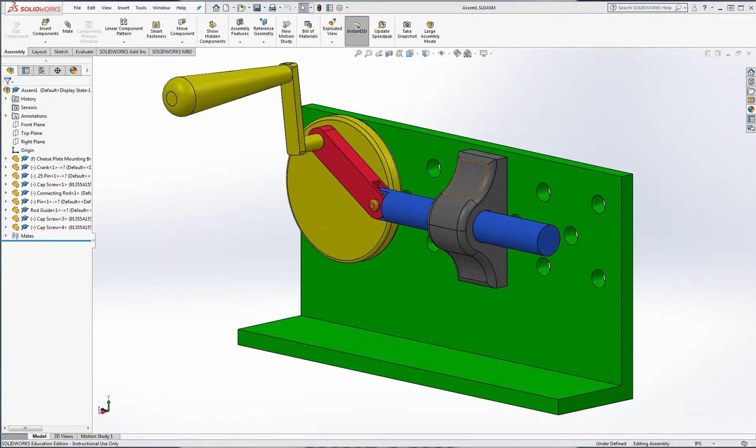My name is Joseph Check, and in today's video we're looking to create this simple assembly within SolidWorks. Hopefully this will give you an introduction to the basic mates within SolidWorks and also just an understanding of how different parts work together in an assembly. This is just a simple mechanism I created that translates rotational motion into linear motion.

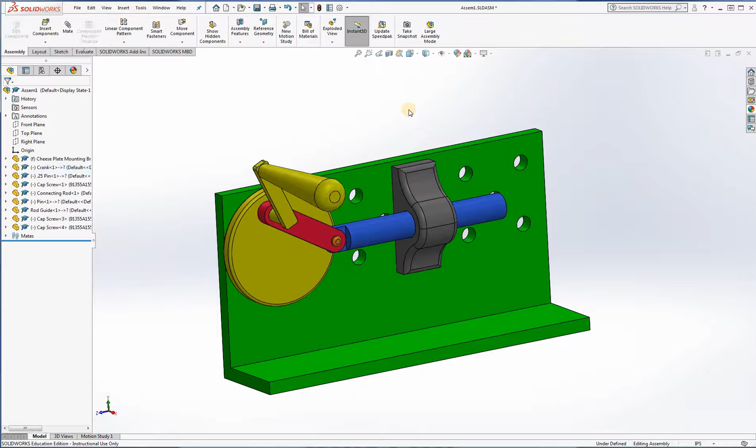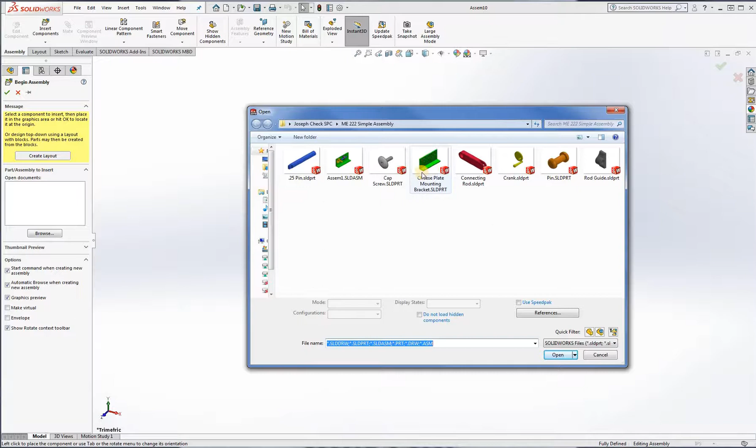When you first open up SolidWorks, you want to head up to the File tab, click on New, Assembly, and OK. Once you find all the parts that you have downloaded, we will start with a static part, which basically means that this part will not move within our assembly. It's basically going to be the part that all the other parts connect to and use as a reference. In our case, it's going to be the cheese plate mounting bracket. So let's click on that one and click Open.

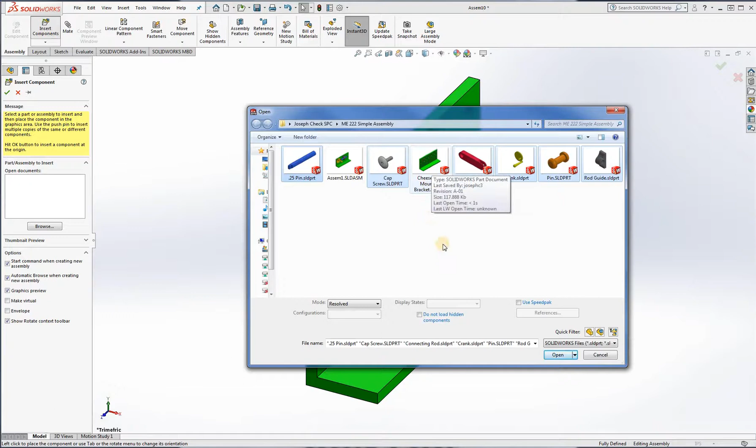Instead of just dragging and clicking into somewhere within my viewport, I'm going to just click on OK, and this basically sets up my part wherever it needs to be in my assembly. Now we can go back to Insert Components, and I'm going to select all of the parts that I have yet to put into the assembly. So I'm going to select all of these. So I'm just excluding the main assembly that's already completed and the mounting bracket that I have already imported. So let's click on OK.

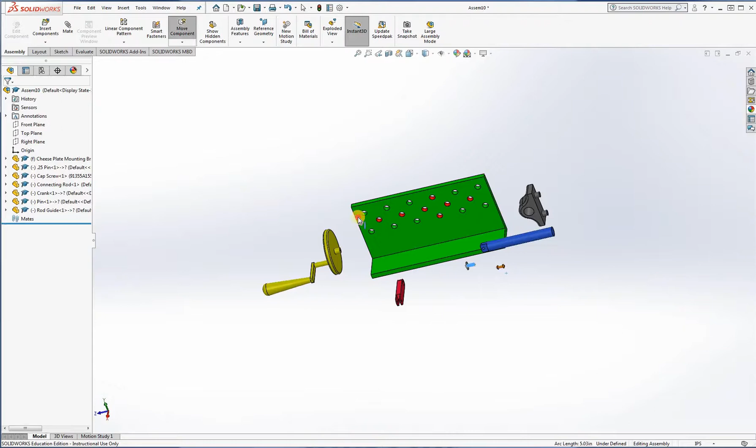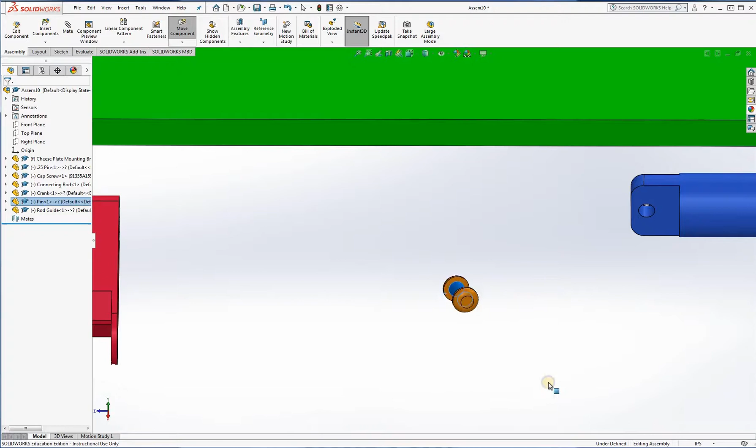And now you can consecutively place all the parts that you selected. So let's go ahead and do that. So once you place all of your parts, you can move them around to make it a little bit more convenient to where they are placed. In order to move a part, of course, we can just click on any surface and drag that where we would like. To rotate a part, such as our pin right here, we can right-click and hold down and then drag that in place to rotate the object wherever we need it.

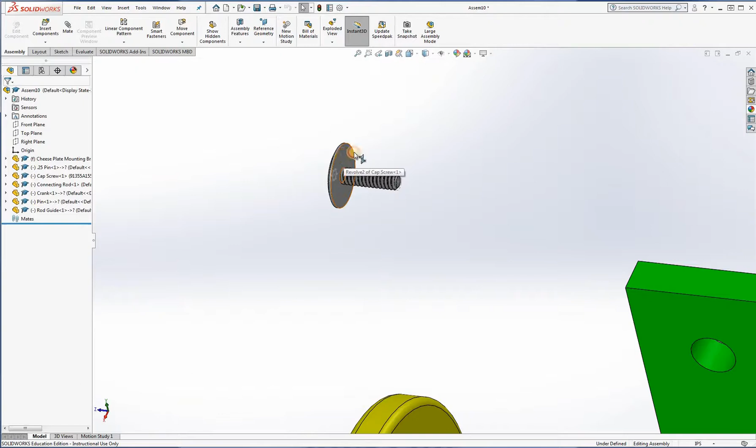Another quick tip is duplicating objects within SolidWorks. So in our case, we need a total of 3 screws, but instead of going up to Insert Components and just selecting one screw after another and importing them, you can hold down Control, click on your part, and drag it out to the side. And this can be repeated as many times as you need. So again, hold down Control and drag down.

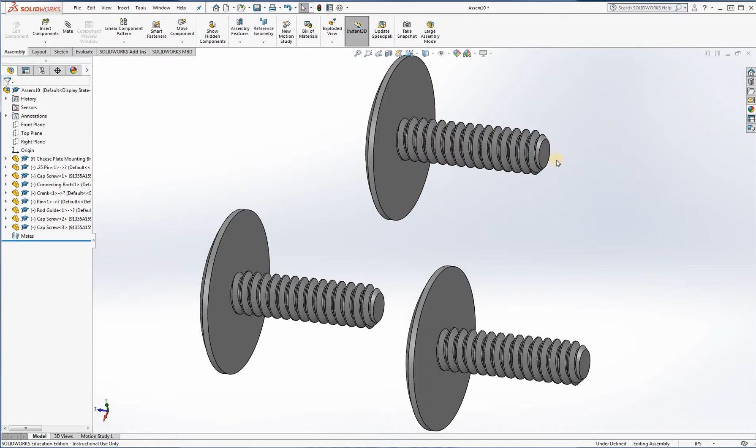Another tip is to remove the sketches that were used to create the part, and you can do this by going to the visibility options drop-down menu and selecting View Sketches and turning that off. That just makes it a little more simple, so you're not selecting a sketch and trying to mate it with different things. So let's go ahead and look at our first part that we want to mate. In our case, let's look at the crank here, and what I want to do is mate this shaft or this rod basically to fit inside of our hole that we have created here.

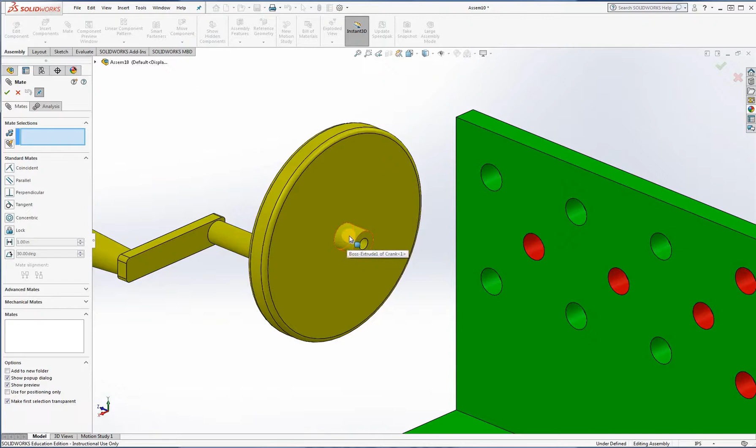So to enter into the mate menu, basically, we click on this mate button. So once you're in this mate menu, you can basically select 2 separate parts and mate them together one after another. When you have finished connecting all the models that you want, you can click the check mark twice. So as an example, I'm going to select this outside surface of this rod and then the inside surface of this hole right here.

SolidWorks automatically applies the mate that it thinks I want and orientates the part to the correct position. If your part does not orientate to the correct position, or if the part is basically backwards, you can always flip it using the mate alignment. So in case your part looks something like this, you can go ahead and go into mate alignment and just choose between these 2 options here until it looks correct.

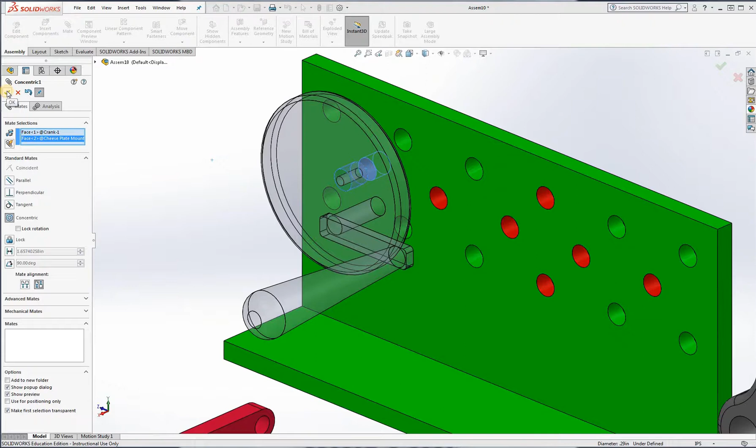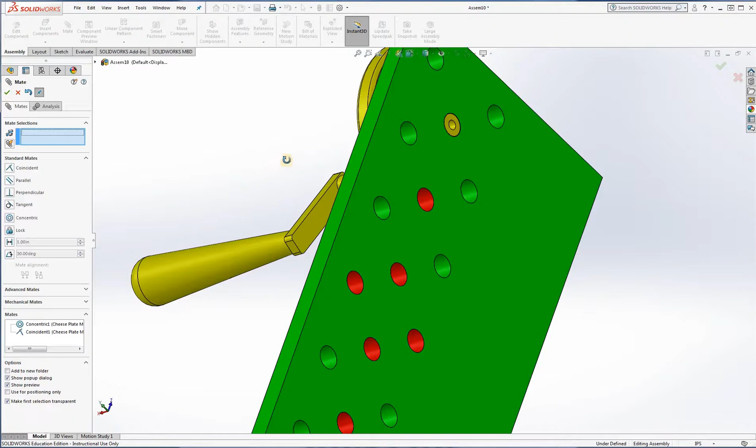Let's go ahead and click the check mark once, and as you can see, it prompts us to select 2 more objects. So we're going to select the face of this part here and the back face of this part here, and then we click OK. This was all the mates we needed to do with this one part, so I'm going to click the check mark one more time and exit out of the mate menu.

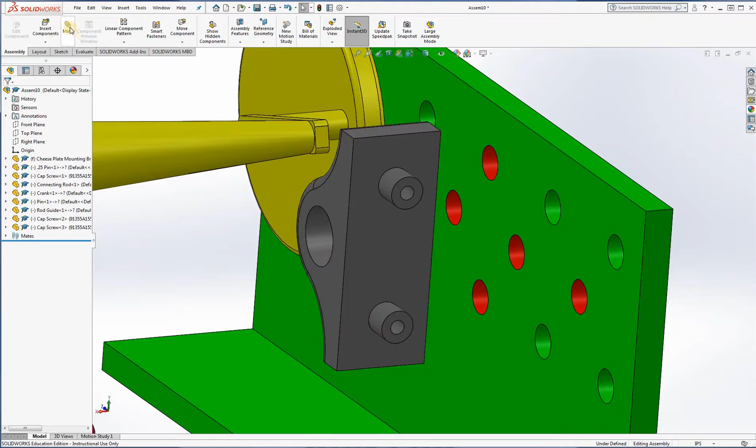So now we can go ahead and look at connecting our rod guide to the mounting plate. We're basically going to do the same operation, but in this case we have two of these slots that need to go into these holes here. So I'm going to go into the mate menu again, select the outer surface and then the inner surface. As you can see, our part has basically reversed its direction, so we want to choose another mate alignment. Our part looks a little weird right now, but that is only because the top rod and the hole are concentric and not the bottom. So let's go ahead and select OK once.

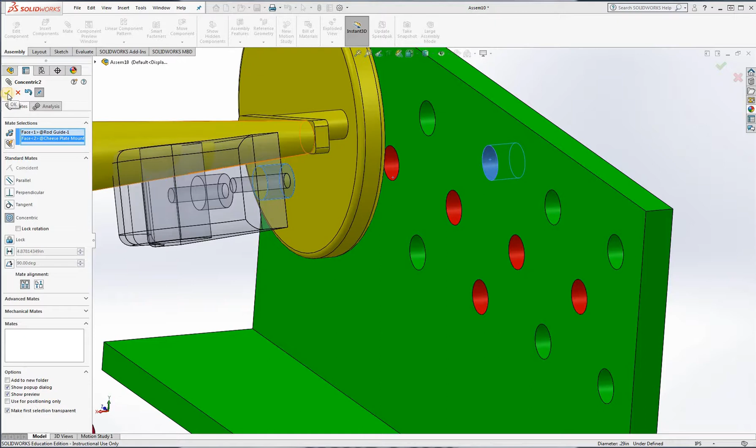We can go ahead and orientate our view to where we can drag this down a little bit, where we can kind of see the other rod here. Let's select the outer face of that and then the inner face here, and then we hit OK.

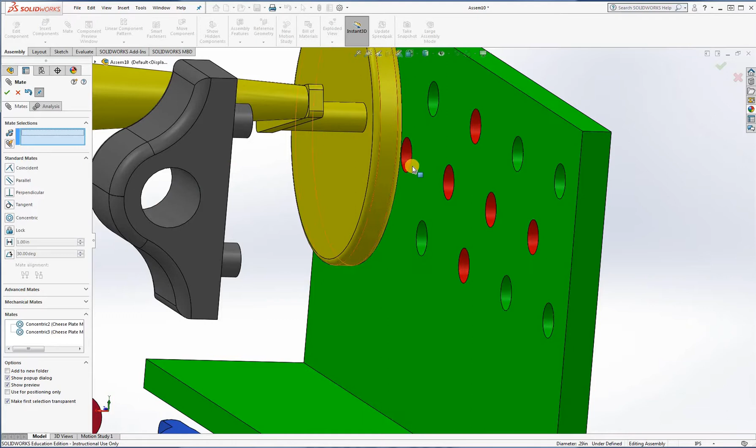So the last operation to connect our rod guide to the plate is to basically select the two faces that need to meet each other. So it's going to be this face and this face. And we'll hit OK twice.

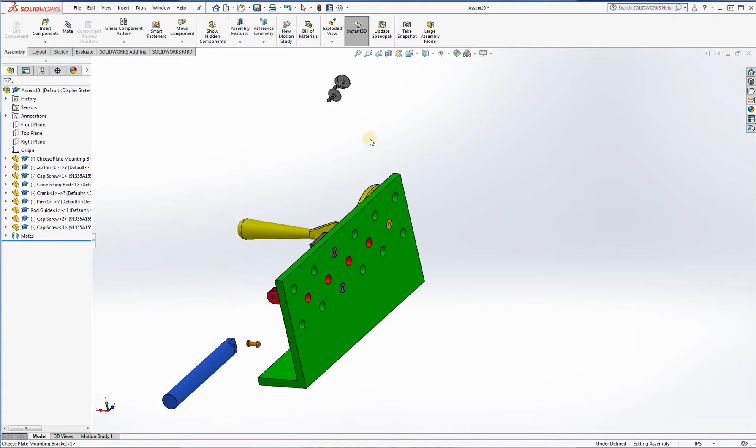That exits the mate menu, and these are the two main components that needed the screws that we duplicated from before. So let's go ahead and drag these screws down here to where we can see them, and let's go ahead and start with the first mate with these screws.

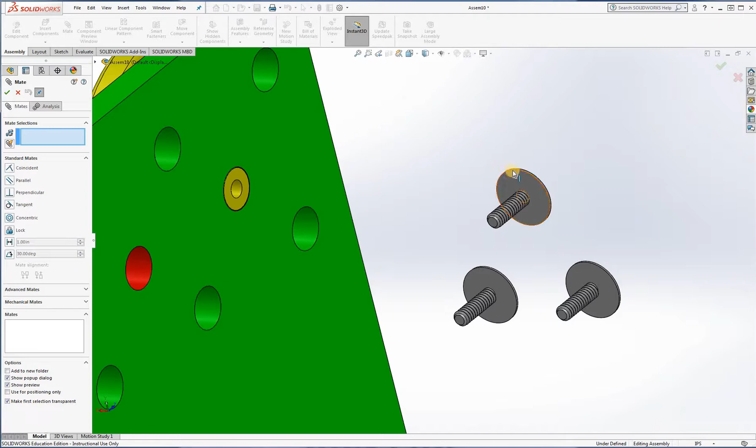So my recommendation whenever you have screws that you need to mate into certain geometry is to not select the helixes or the threads from that screw, but the edge of the screw. So for example, let's go up to the mate option. So let's just select the edge of our screw and any edge of our part.

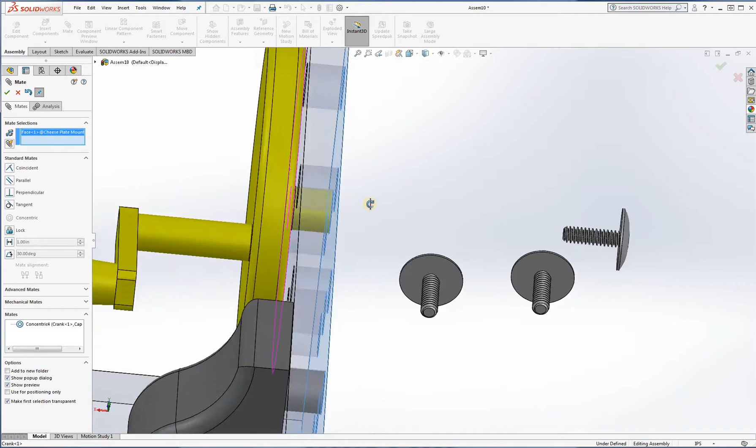Our screw is basically in the wrong alignment, so let's just click on Mate Alignment, select OK only once, drag out our screw, and then we can select the two faces that need to meet. In our case, it's this face here and this face here. We select OK. And now this operation can be repeated as many times as needed.

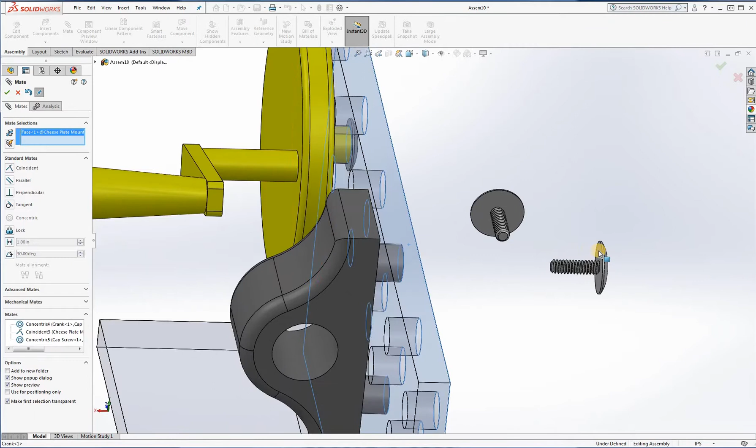So select the outer edge of this and the outer edge of this. Select OK, drag out, connect this face with this face. Select OK, orientate our view to where we can see both again.

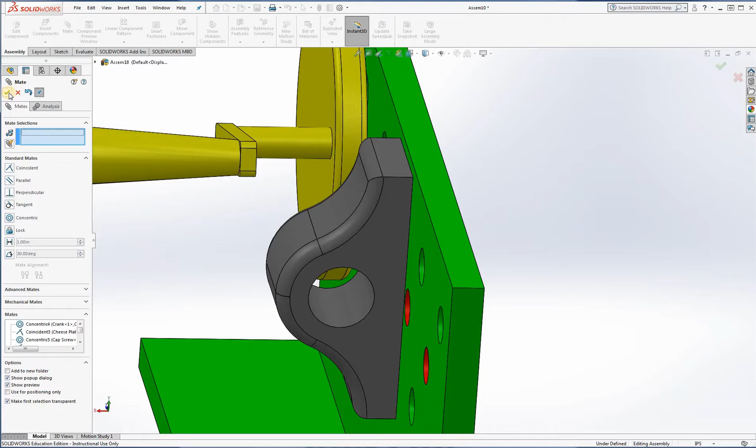This edge with this edge, mate alignment, click OK, drag out, this face with this face, and click OK twice to exit the menu. And now we can mate our pin into the rod guide here. Let's go to Mate, select the outer surface of our pin and the inner surface of the rod guide. Select OK.

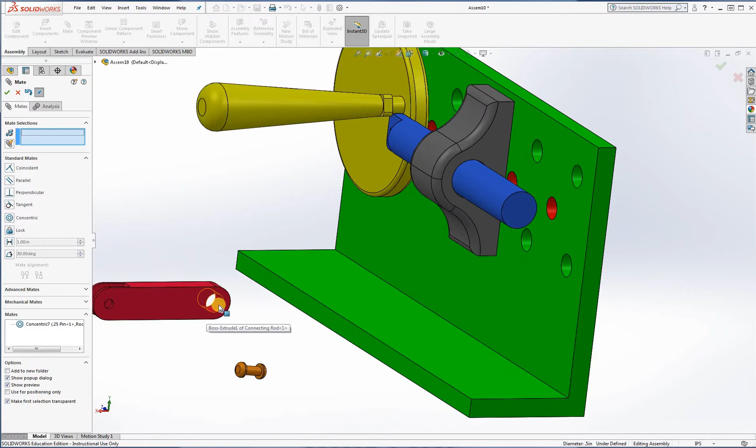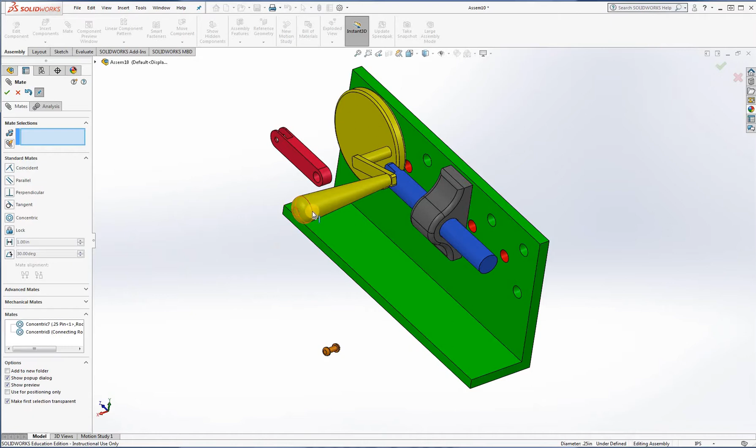Select this inner circle of our connecting rod, and then we want to select the outer surface of our crank here. Select OK. So things can get a little weird once we have these mates being made and they're not all connected yet, but don't worry about that yet. Let's go ahead and just kind of free up our view to where we can see what's going on here.

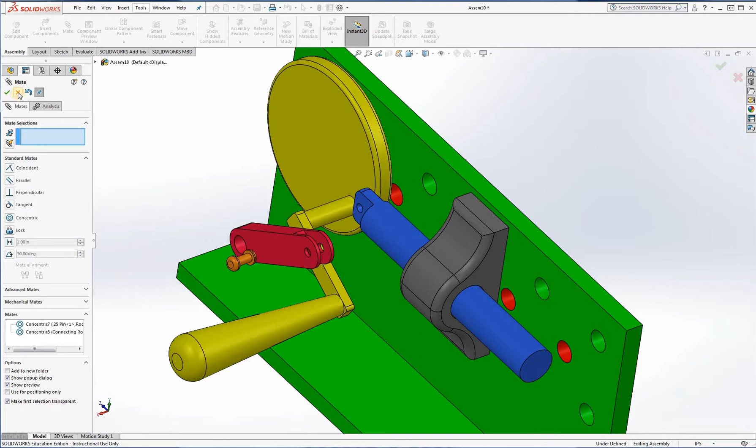And let's move this guy up to where we need to see him. Let's rotate this object to where we can kind of see both sides of this part. Alright. So what we want to do now is exit our mate menu just by clicking OK.

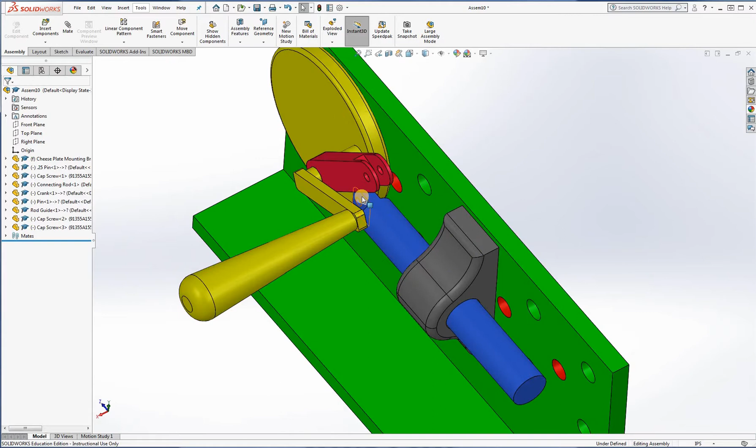So where this can get a little tricky is creating a width mate between two separate objects. It would basically create a gap in between those two objects that would be equal in distance. So let's just go ahead and look into how we would do that. So basically we want this face and this face to be in between this face and this face.

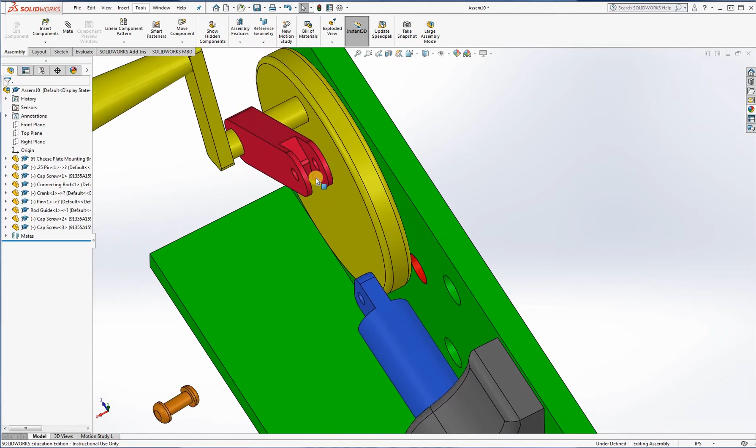So let's go ahead and just make some room to where we can actually see what is going on here. We want to select the two faces that will be next to each other on each side. So it's going to be a total of 4 faces that we do select. Let's go ahead and select the 2 inside faces here, and then the 2 outside faces of our rod right here. When all of those 4 faces are selected, we can hit Mate.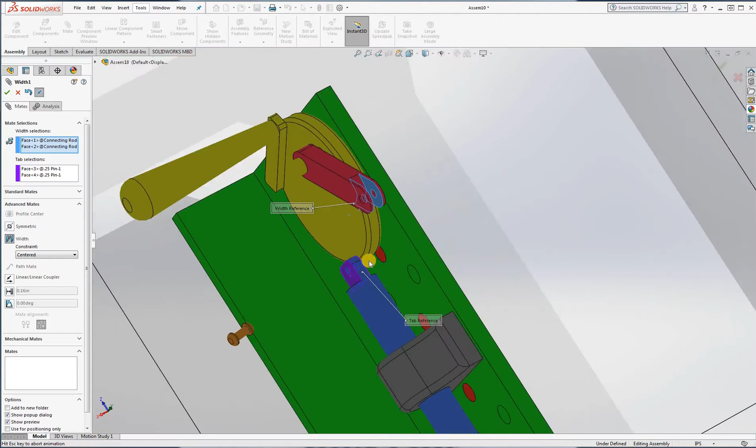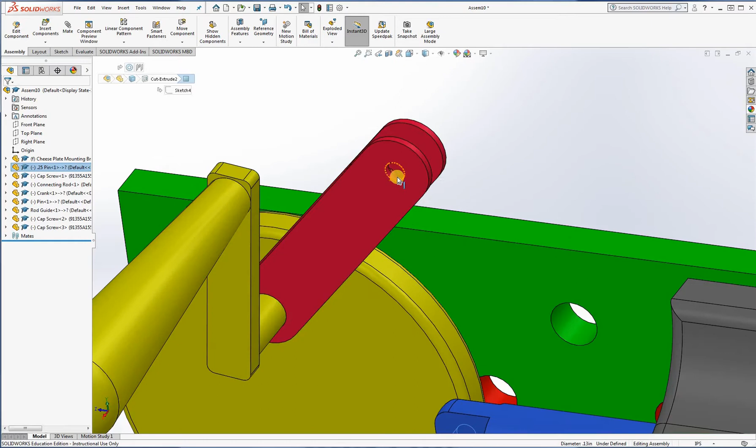If we look at the top view, we can kind of see that our 2 parts now have this gap in between them. So the next thing we need to do is make sure that these 2 holes here are concentric with each other. To do this, let's go ahead and get out of the Mate menu, and we want to select the inside surface of both of these circles. Whenever we hit Mate, it will automatically select a concentric mate.

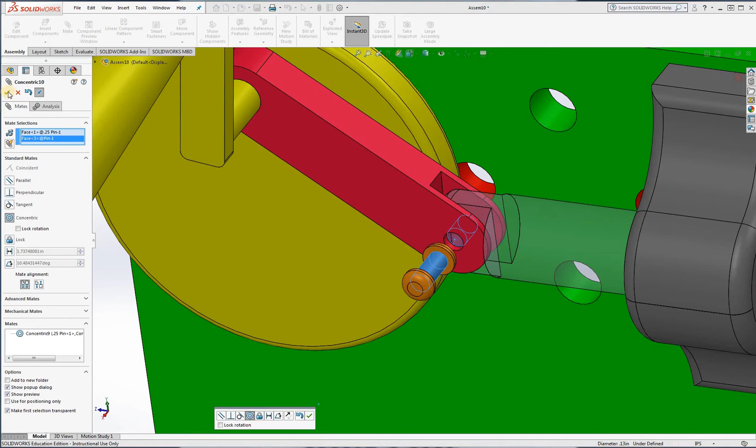Click OK once, and then we can add our pin into this slot here. So let's select any interior surface of this slot here, and then the outer surface of this rod. Select OK. Let's go ahead and pull our part away a little bit, and what we're going to do is select OK, exit that Mate menu.

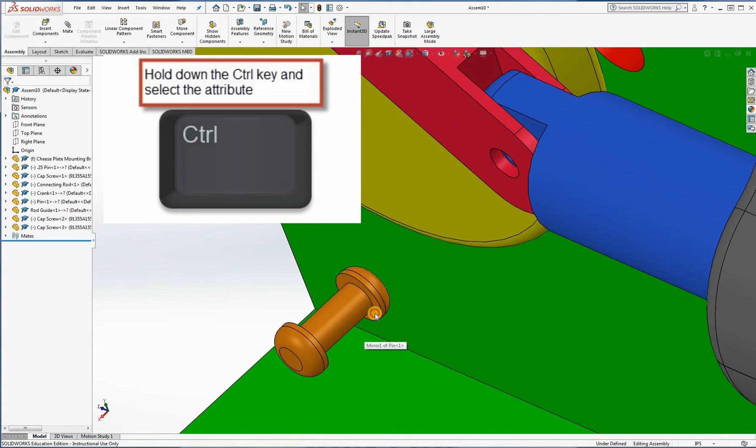So we're basically going to do the same thing that we did to create an equal distance gap between these 2 parts that are next to each other. So holding down Control, let's select this face of our part, this face of our part, and we need to orientate our view to where we can see this side here. So hold down Control and also click that side.

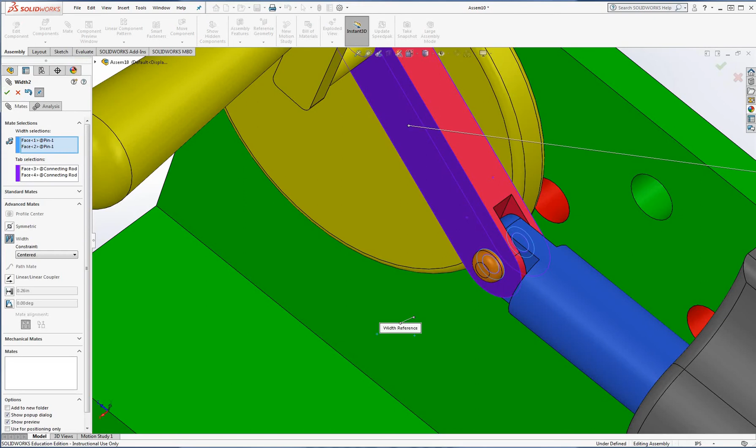So we should have a total of 4 faces selected. Once those are selected, you can select Mate. Click OK and OK. Now if we orientate our view to the top, we can now see that we have an equal distance between all of the gaps of our part. This is exactly what we wanted.